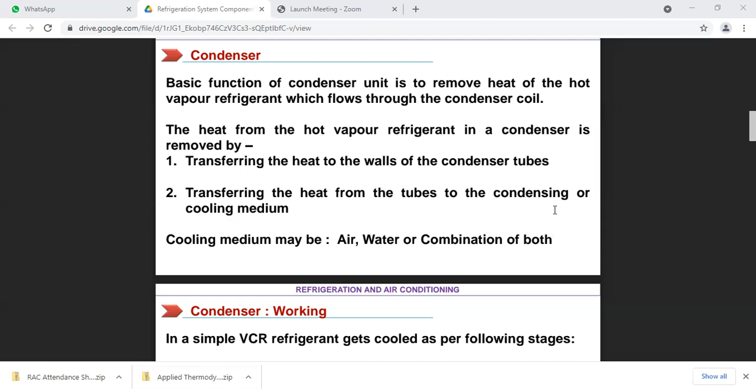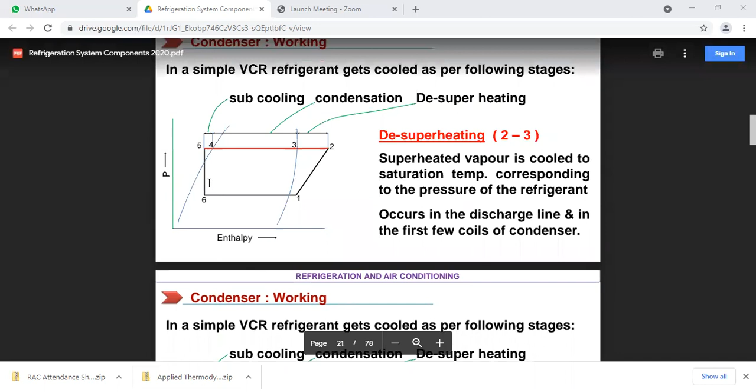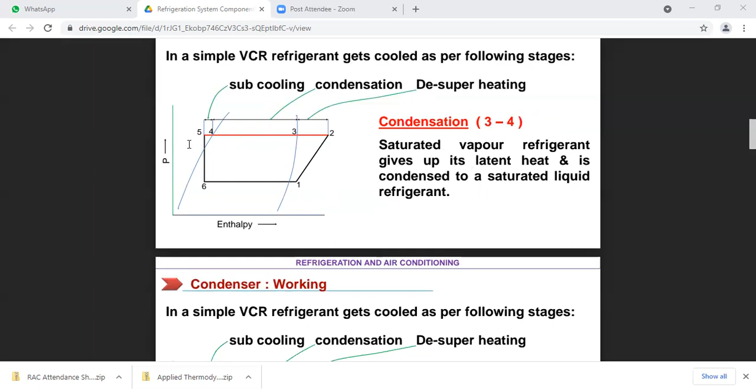If the steam is superheated, during de-superheating from 2 to 3 we achieve cooling, and from 3 to 4 we observe the condensation process. Superheated vapor is cooled to the saturation temperature at point 3. During condensation from 3 to 4, the saturated vapor refrigerant gives off its latent heat, moving from the dry saturation region to the liquid saturation region. In subcooling from 4 to 5, the temperature of the liquid refrigerant is reduced below its saturation temperature.

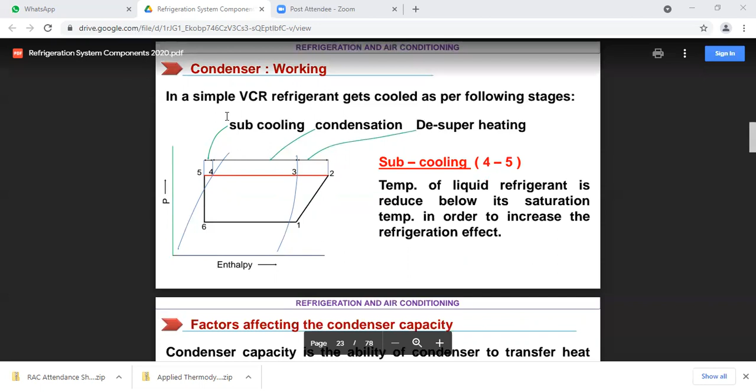Now we are going to discuss the factors affecting the condenser. Generally, the factors affecting the condenser are: the material from which the condenser is manufactured, and second, the amount of contact - meaning up to what extent the vapors come in contact with the cooling medium.

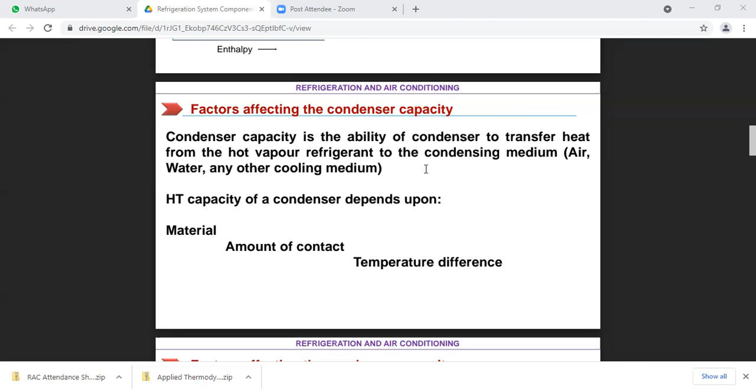The third factor is the temperature difference between the condensing media and the coolant, such as water. So these three parameters - material, amount of contact, and temperature difference - determine the condenser's capacity.

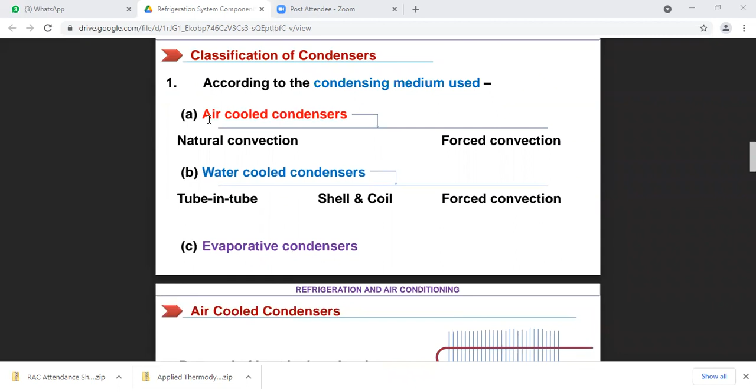Next, we are going to discuss the classification of the condenser. According to the media used, if we use air media, there are two types: natural convection and forced convection. In water cooled condensers, there is tube-in-tube, shell and coil, and forced convection types. The third category is the evaporative condenser. So the classification is: air cooled condenser, water cooled condenser, and evaporative condenser.

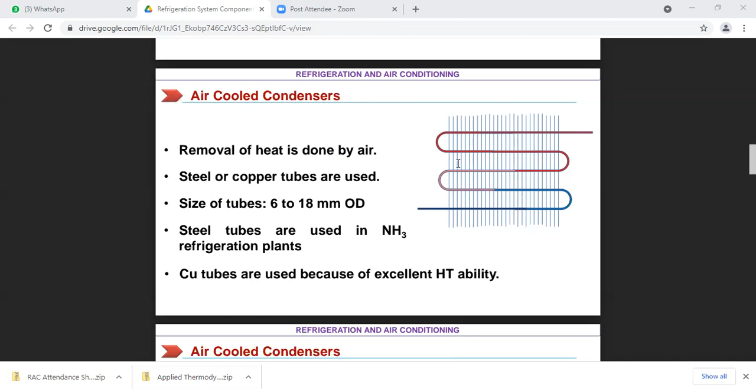Now we are going to discuss how the air condenser works. In the air condenser, heat removal is done by air, and the tubes are made of steel or copper, with outside diameter varying from 6 mm to 18 mm. Steel tubes are used in ammonia refrigerant plants, and copper is used for these tubes because it has high heat transfer capacity.

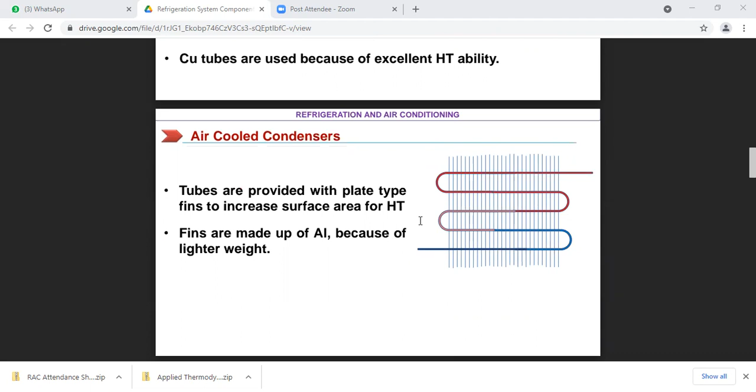In air cooled condensers, the tubes are provided with plates, or fins, to increase the surface area for heat transfer, ensuring effective heat transfer. These fins are made of aluminum, which is lighter in weight.

In air cooled condensers, a single row tubing provides the most efficient heat transfer, though single row condensers require more space than multi-row condensers. Single row condensers are used in small capacity refrigeration systems such as domestic refrigerators, freezers, water coolers, and room air conditioners.

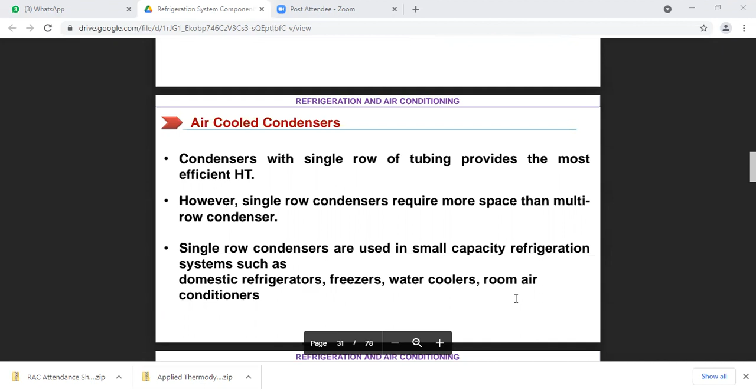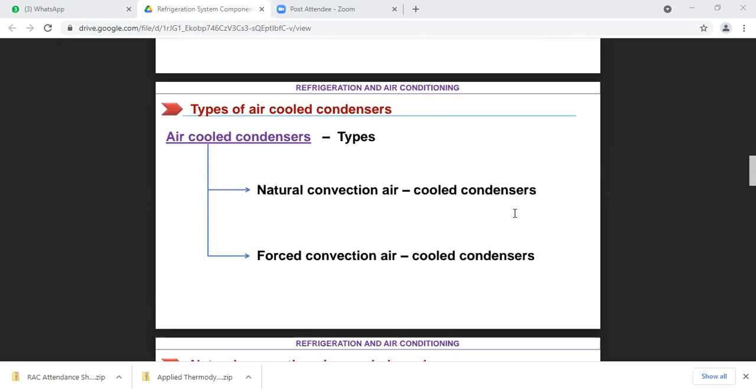The types of air cooled condensers are natural convection and forced convection air cooled condensers. In natural convection, heat transfer from the condenser coil is taken by air through natural convection, and the heat transfer rate is slower, requiring a larger surface area.

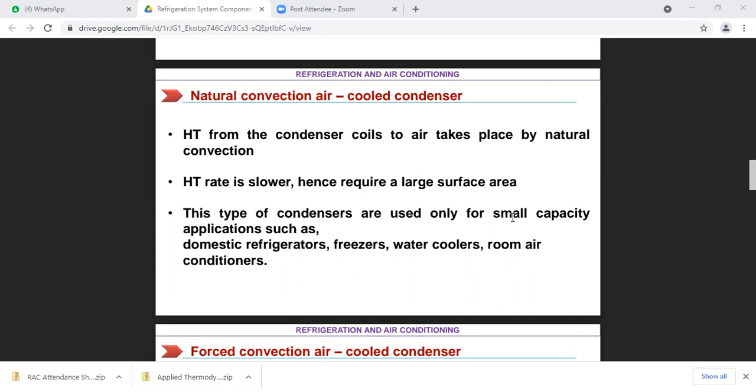These type of condensers have a small capacity, and we use such condensers in domestic refrigerators, freezers, water coolers, and room air conditioners. This is related to the natural convection air cooled condenser.

In forced convection air cooled condensers, we use a fan or blower. A propeller fan or centrifugal fan is used to force air to flow over the condenser coil to increase its heat transfer capacity. In forced convection, there are generally two types: first is the base mounted air cooled condenser, and second is the remote air cooled condenser.

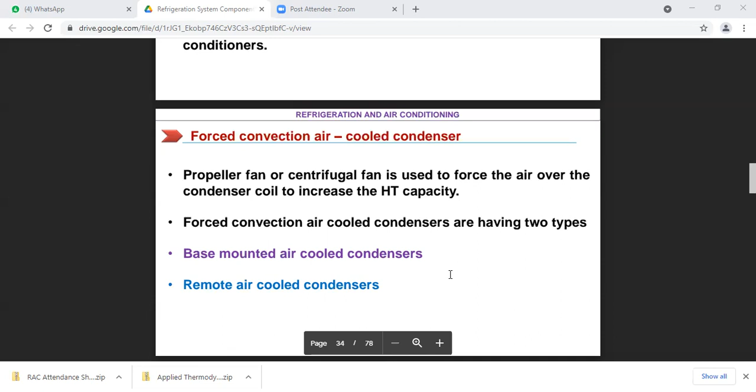In the base mounted air cooled condenser, propeller fans are used, and these fans are mounted on the same base as the compressor, motor, and receiver. The fan is mounted on the shaft of the motor, and this type of arrangement is used for systems with 10-ton capacity or less. So keep in mind, in a base mounted air cooled condenser, the fan is mounted on the same base as the compressor, motor, and receiver.

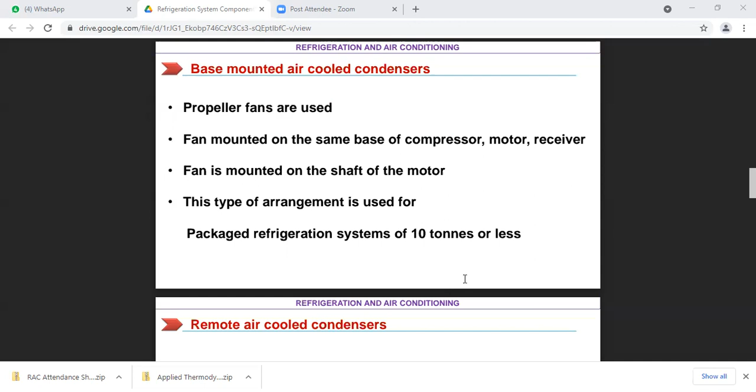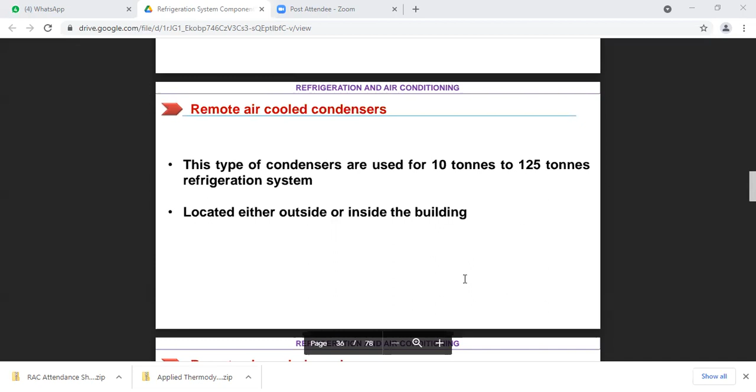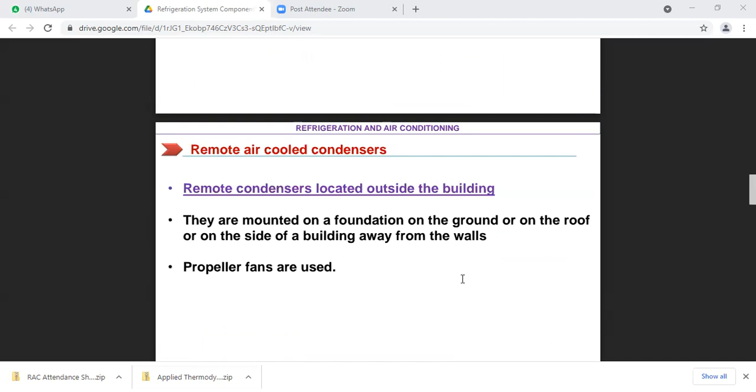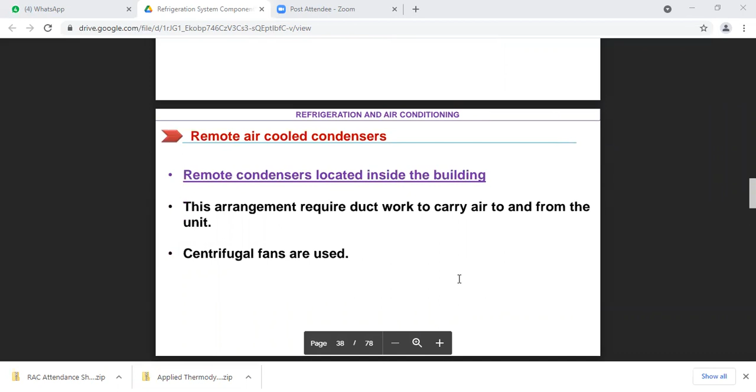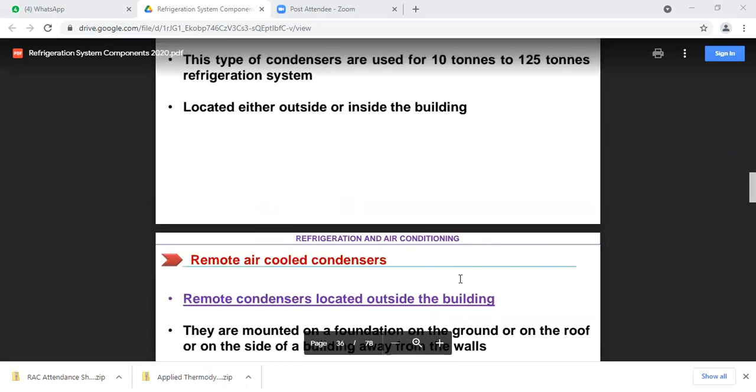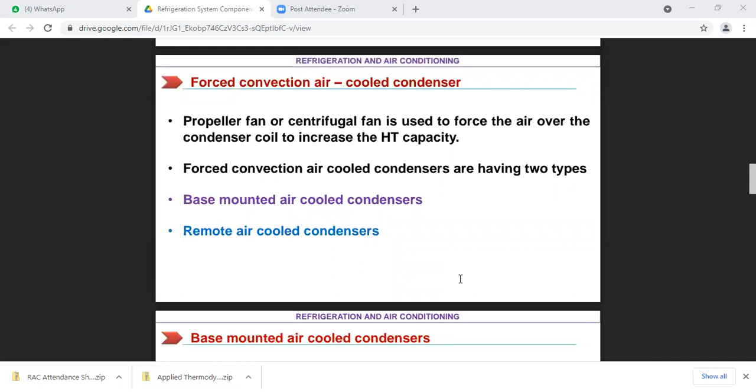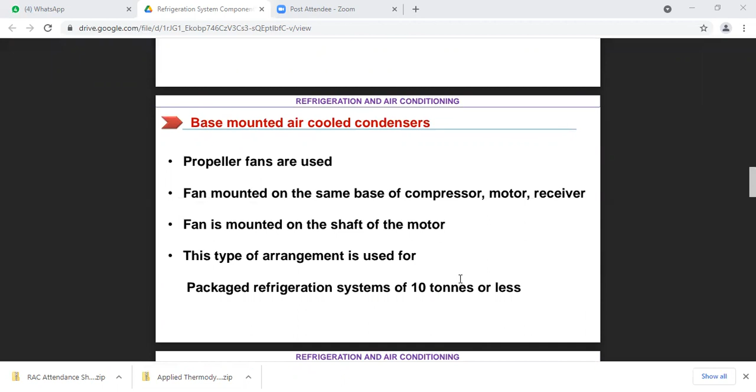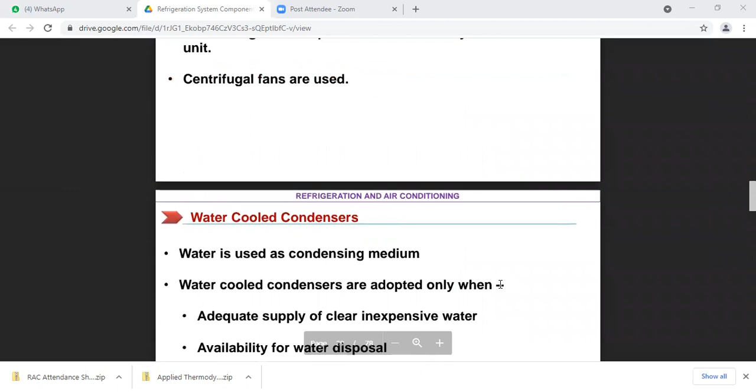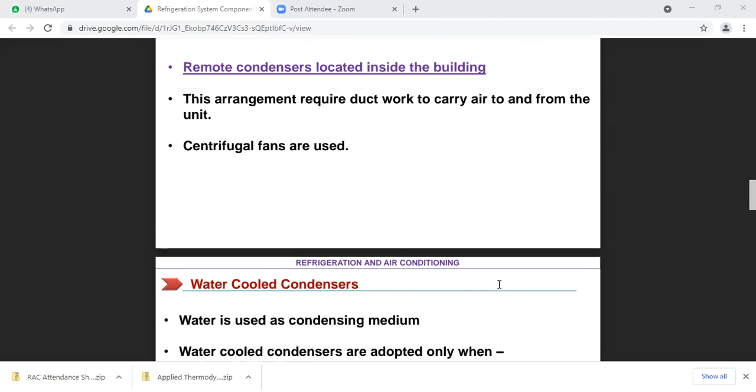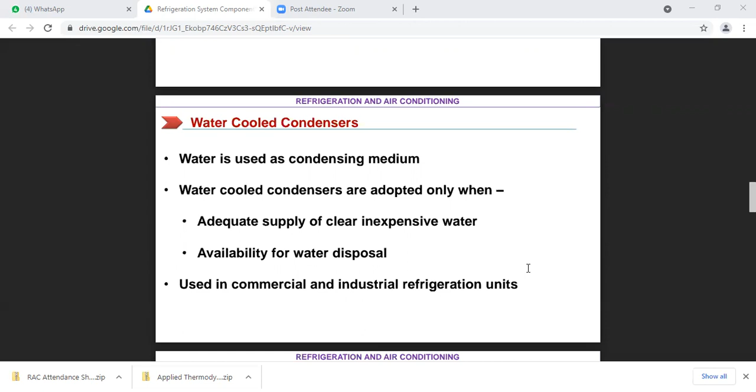Water from the city main line is introduced into the condenser, where heat exchange between the refrigerant and the water takes place, converting the hot vapor refrigerant into liquid refrigerant. So the water from the city main line extracts heat from the condenser and is converted into warm water, because it extracts heat from the refrigerant, and the hot refrigerant is converted into liquid refrigerant. This is the water cooled condenser system.

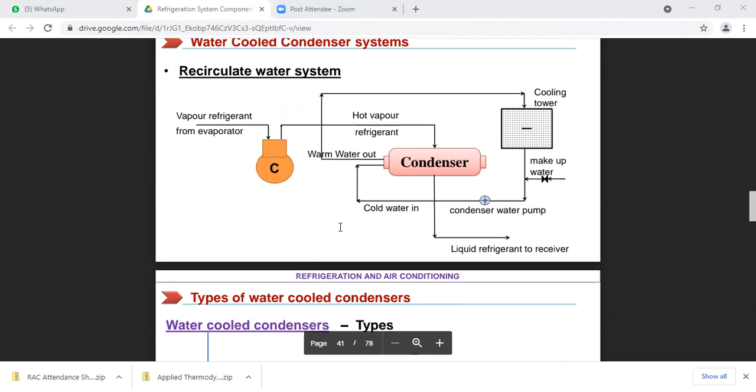Next is the recirculated water system. In this system, we use the same water again and again. If you observe this figure, vapor refrigerant from the evaporator comes into the compressor, where it is converted into hot vapor refrigerant, and this hot vapor refrigerant is introduced inside the condenser.

In this condenser, there is heat exchange between the hot vapor refrigerant and the water. So the hot refrigerant is converted into liquid refrigerant, which is collected in the receiver. That is the path of the refrigerant. But what is the path of the other, that is the water?

Cold water is introduced inside the condenser and extracts heat from the refrigerant, converting into warm water, and this warm water is again sprayed into the cooling tower. In the cooling tower, it is converted into cold water, and if there is a loss of water or the quantity becomes less, makeup water should be added.

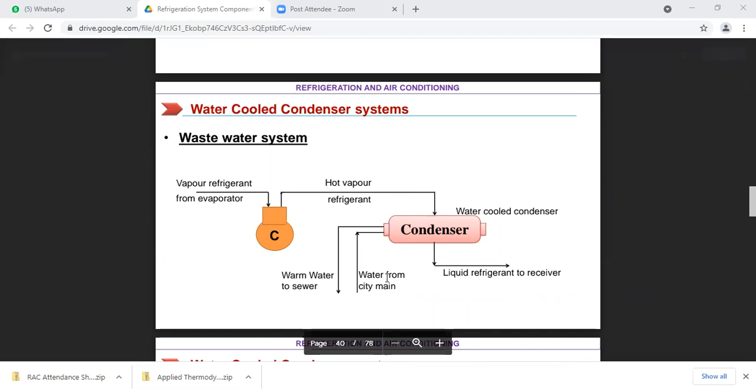In this system, we are using the water once, and again we are leaving that water. This is the wastewater we are using for such type of cooling. So this system is called the wastewater system. In another system, recirculation of the water happens again and again, so this is called the recirculated water system.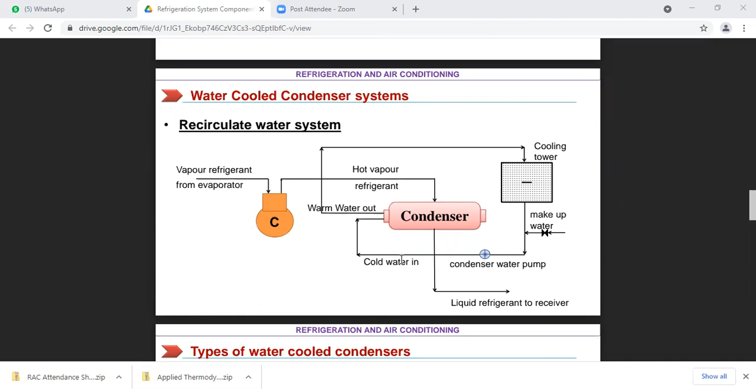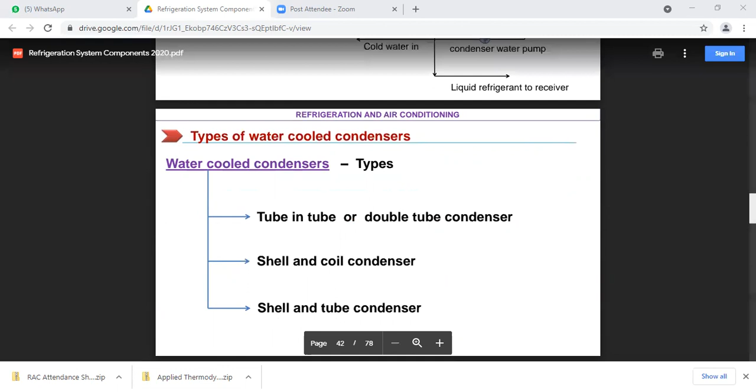Now next we are going to discuss the types of water cooled condenser: tube in tube condenser or double tube condenser, shell and coil condenser, and shell and tube condenser. So these are the types of water cooled condenser. First, we are going to see the tube in tube condenser or double tube condenser.

It consists of two concentric cylindrical tubes, one inside the other. Water is taken into the inside tube from the inner side, and the refrigerant vapor is made to flow from the opposite direction in the annular space between the two tubes. Due to this counterflow heat exchanger design, maximum amount of heat is taken out, and this is achieved due to the temperature difference between the inlet and outlet water.

This double tube type condenser finds its maximum application as a booster condenser for meeting peak load demand in conjunction with the chassis mounted air cooled condenser. They require a separate receiver for storing the condensed liquid. The size of the liquid line between the condenser and the receiver should be larger than the liquid line leaving the receiver, to permit free drainage and allow recondensation of the entrapped vapor.

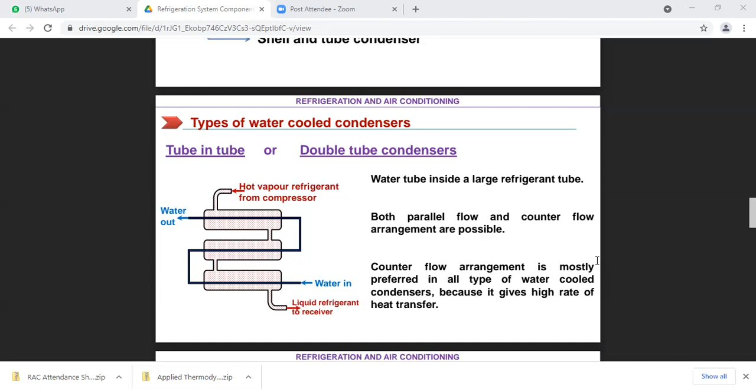Second is the shell and coil condenser. Here one shell is used, and inside this shell, coils are provided. In the shell, the refrigerant flows, and in these coils, the cold water flows. It consists of a welded steel shell and one or more bare or finned tubes or coils placed inside. The condensing water is circulated through the coil.

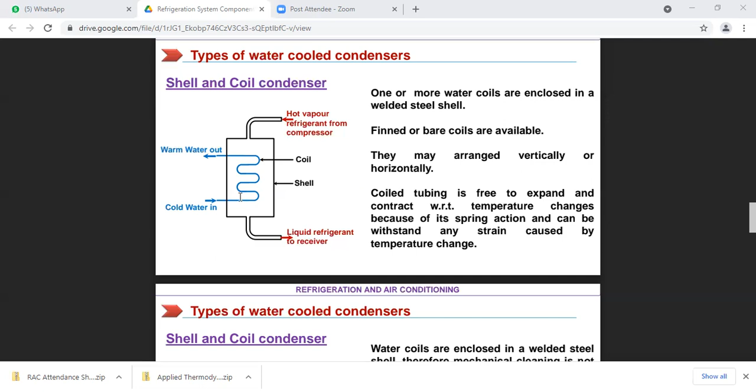In such type of system, overcharging of the refrigerant should be avoided. Shell and coil condensers are fabricated for small and medium condenser sizes, due to their simplicity of construction and high overall heat transfer, which is due to the curvature. This is the shell and coil condenser.

The refrigerant enters at the top and gets cooled and condensed as it comes in contact with the water tubes. This water is coming from the cooling tower or pond. The condensed liquid is drained off from the bottom, and the bottom portion of the condenser serves as the liquid receiver.

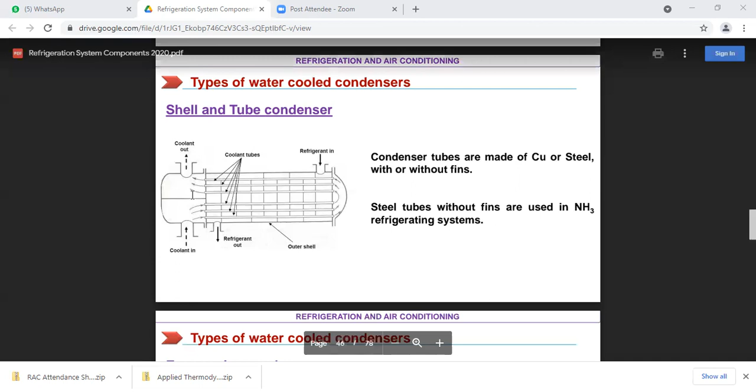In such cases, it is designed for receiving 125% of the refrigerant as compared to the designed charge amount. In some condensers, extra rows of water tubes are provided at the lower end for subcooling the refrigerant, which is below the condensing temperature. This is the shell and tube type condenser.

The last one is the evaporative condenser. These are used with both air and water as condensing medium, to condense the hot vapor refrigerant. These condensers perform the combined function of a water cooled condenser and a cooling tower.

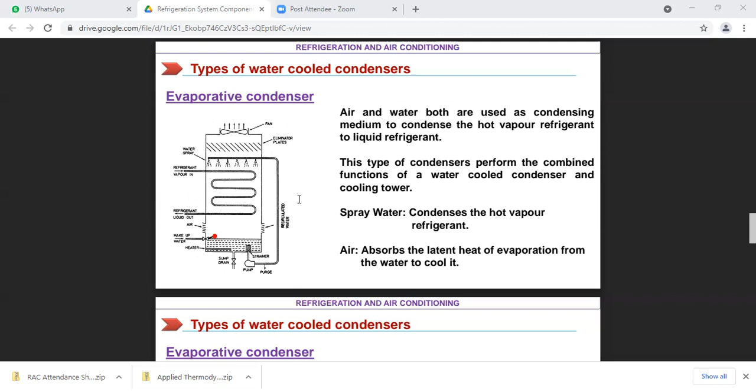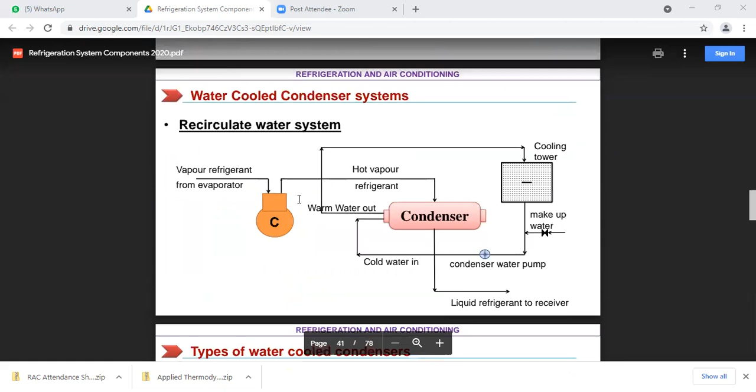So this is all about the condensers as we have discussed. In today's part we have discussed what is meant by a condenser. Next we have discussed how condensers are classified, into air cooled condenser and water cooled condenser. So this is all about today's lecture.